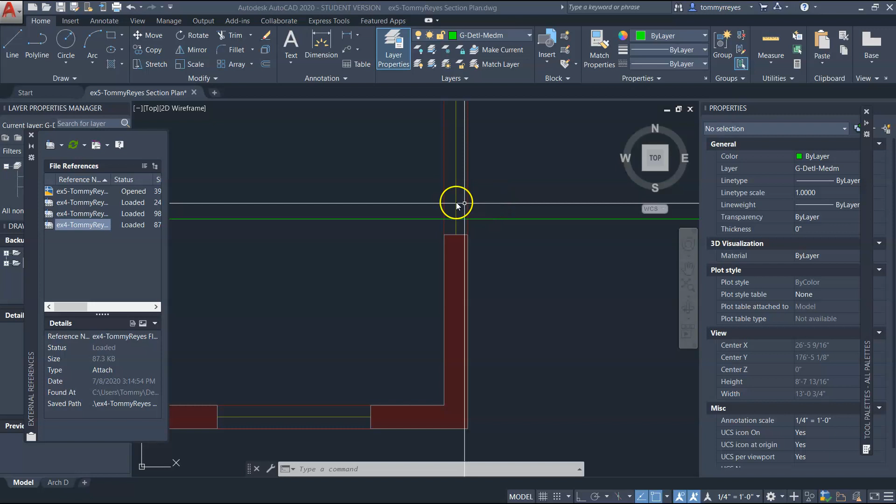Okay, I'm going to go ahead and show you how to do a wall section, but first I just remembered that we forgot to do this window. So I'm going to show you how to do that. And let's go ahead and get into this wall right here. I also have to clean this up as well.

So now we need to know this window height. How can we get this window height? Well, we can get that from the elevations. And let's look at what we need to find. Okay, so we need this front side. And right here.

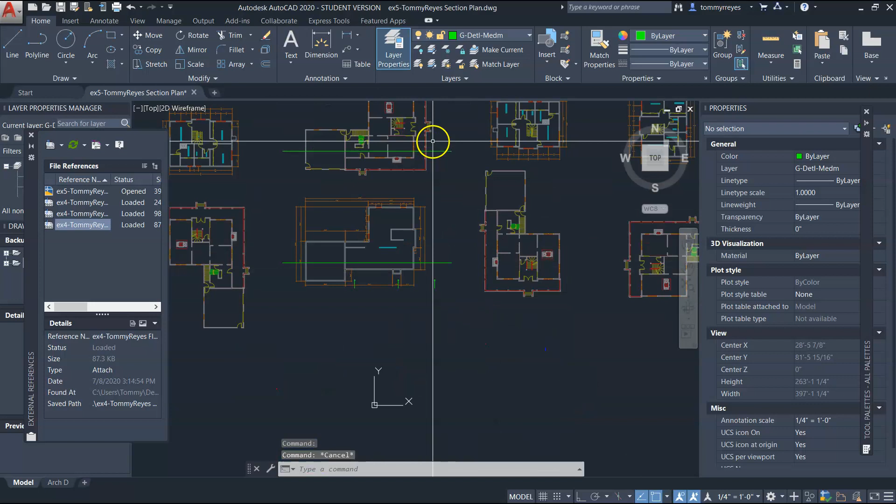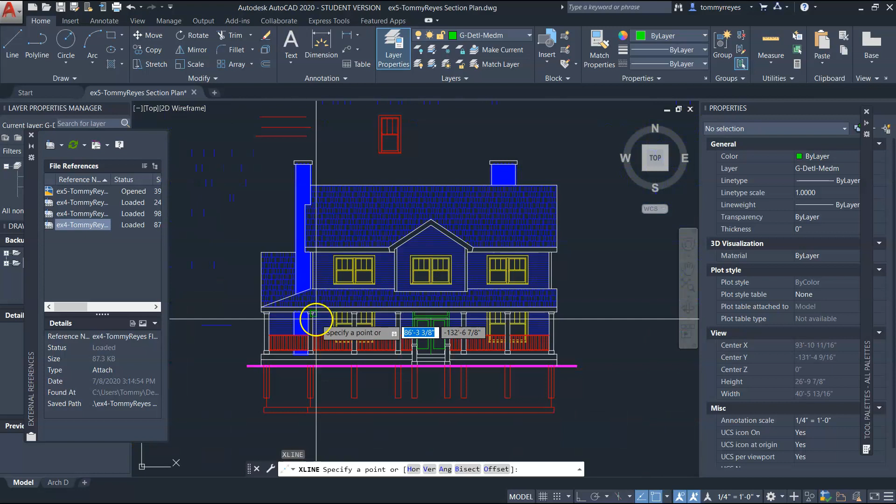So let's go ahead and get this going. So I'm just going to use this. In fact, this was the front side, but I know all these match. Oh, wait, here's the front side. So I know all these windows match up. So I'm just going to do XL, horizontal, H, and I'm going to match this up.

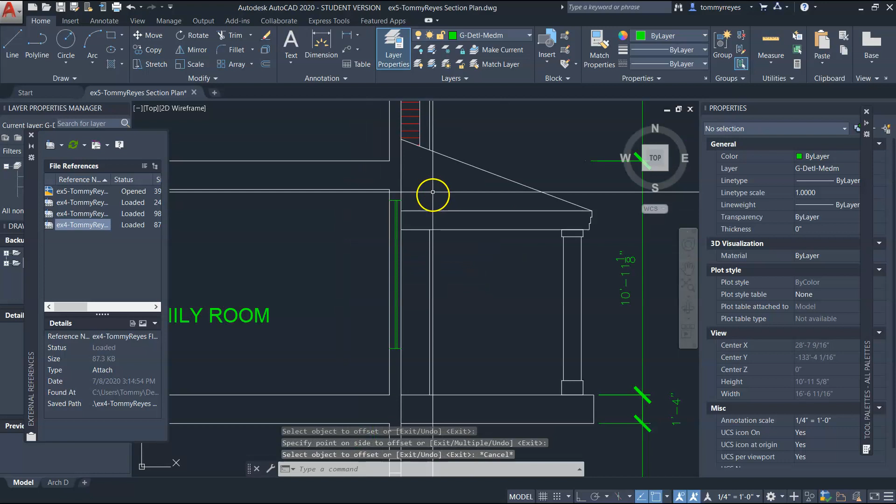Because we need to know where everything's at. And so I'm going to go ahead and trim here and here. And now I'm going to draw a line here and here, offset this by 1 inch. And there you go. Let me toss this on the window layer. So I got to make sure that everything's on the right layer.

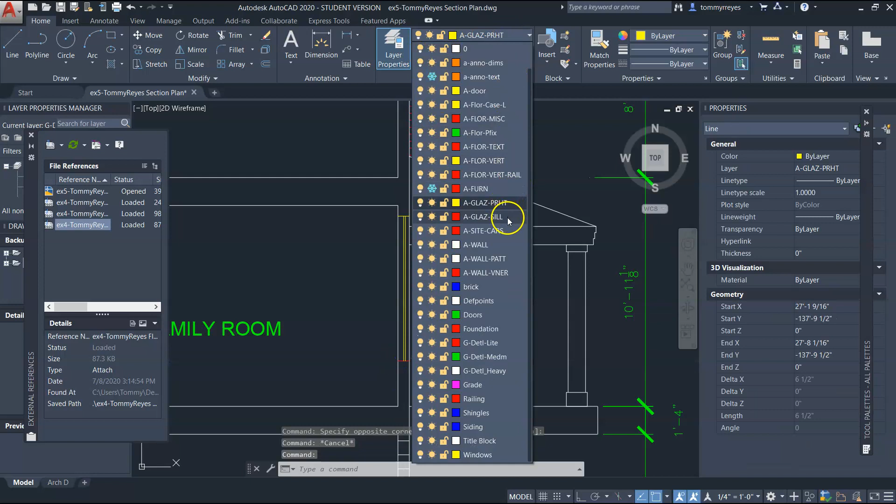So that's a sill. Okay. So here's the window sill. And here is, let's see, where's it? Sill. You know what, I'm just going to put that on the sill as well. Okay, there we go. And so this is the thickness of the window pane, this is the window sill, and this is the window header. And there you go. The walls are still intact.

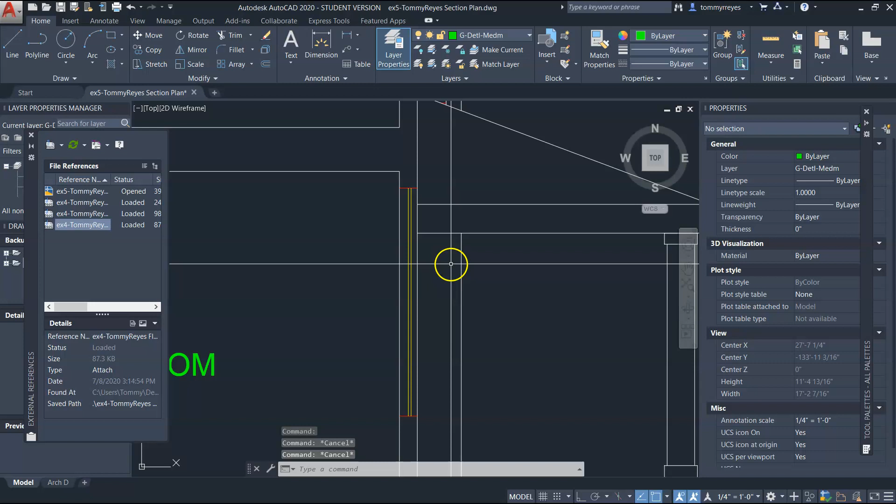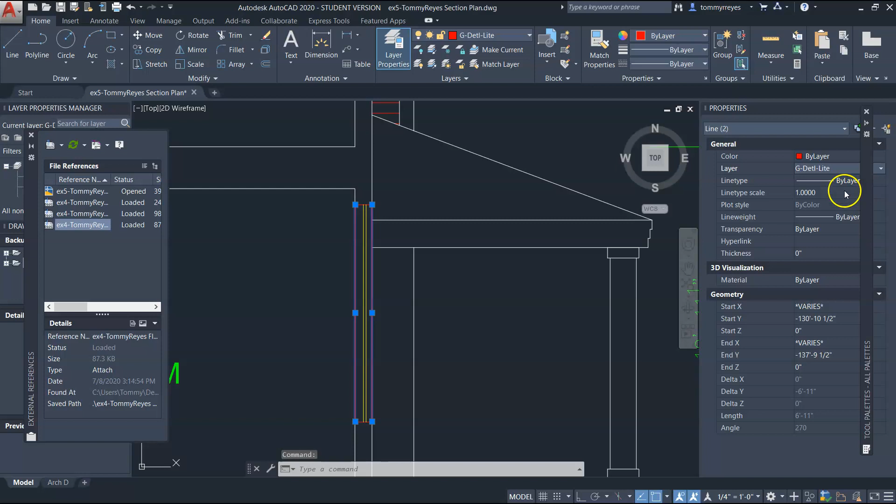And the reason why they're still, actually they should be broken lines. And let's do this. So I'm going to go ahead and fillet that. And some people might think, well, why does that matter? Well, if you want to show this a little lighter, which I do, I am going to show this a little lighter. I could do light or medium, and I think I'm going to go with light. And there we go. And so when that prints out, these other lines are going to print out pretty heavy, but this is going to show that this is a wall and not a section through a wall.

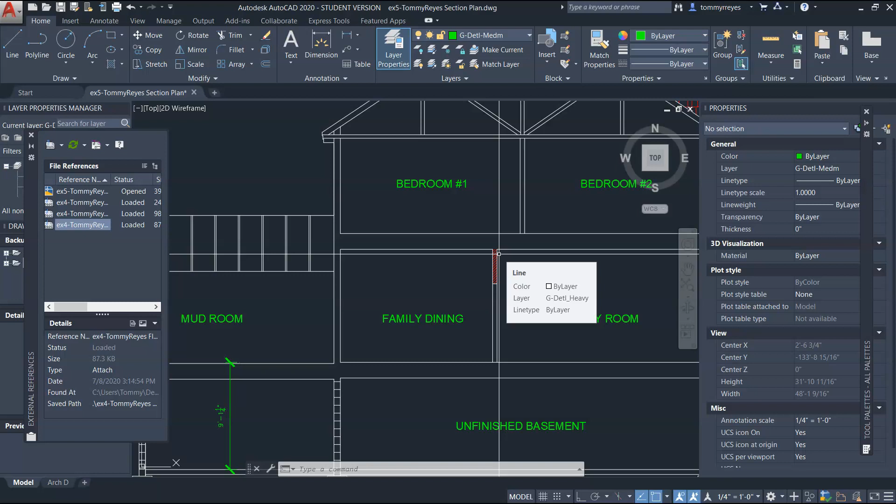This is a section through a wall. And so we are showing that. And since we're cutting through walls, you can actually hatch if you want. But we're not going to do that. I just showed you this part right here. You're actually supposed to hatch through all of these. And I want to say it might tell you how to do that later in the chapter. It might not, but you're supposed to hatch these. And in fact, go ahead and hatch them. Let's go ahead and do that. So let's move this, and let's talk about hatch.

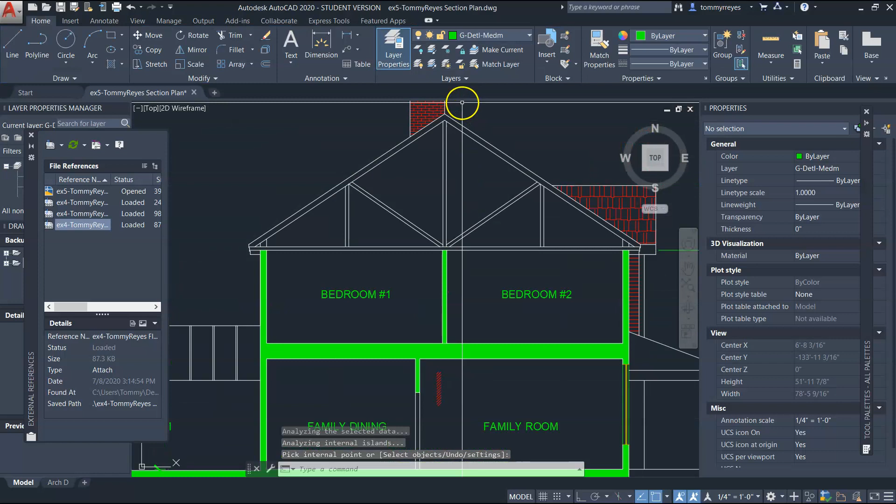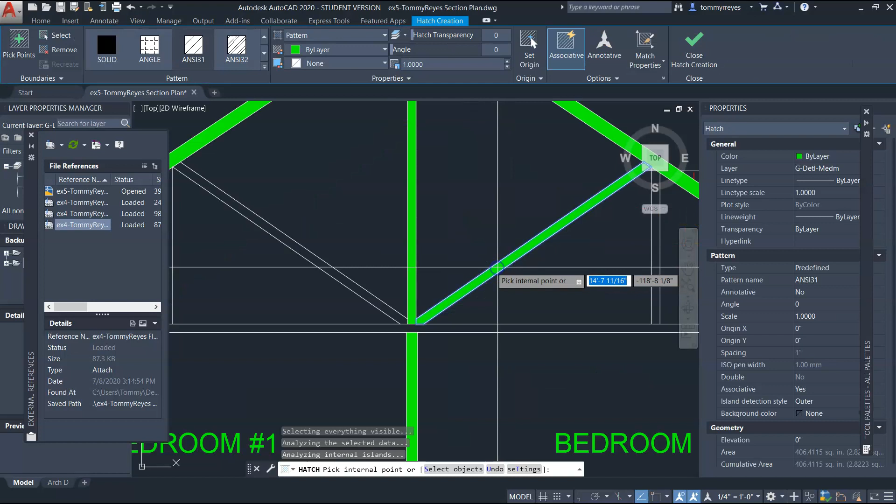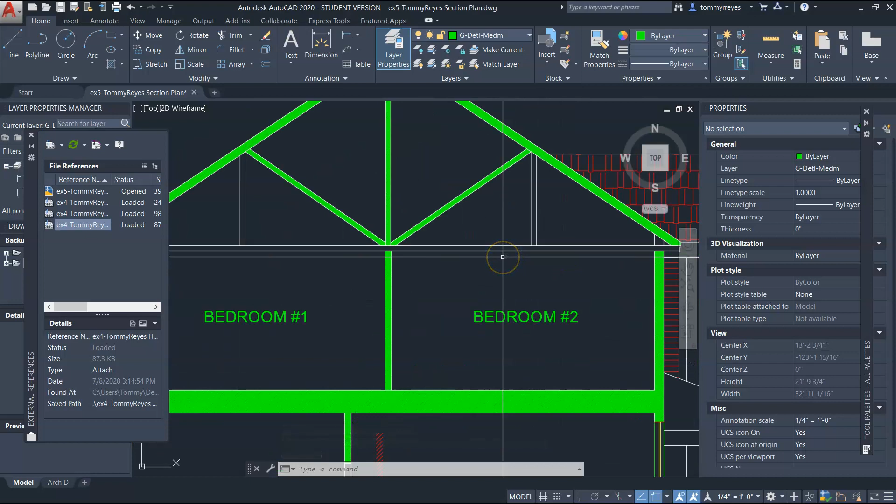So when you hatch, you don't want to hatch everything all at once. If it only highlights very few things, well, that's fine. I hit the spacebar often because the hatch command is notorious for messing up things that you didn't intend to mess up. So it's saying that there's no closed boundary determined, and that's because everything is sort of off screen. So let's see. There we go. Specify the point located on the object. Okay, so I accidentally hit completely on an object. Okay. There we go.

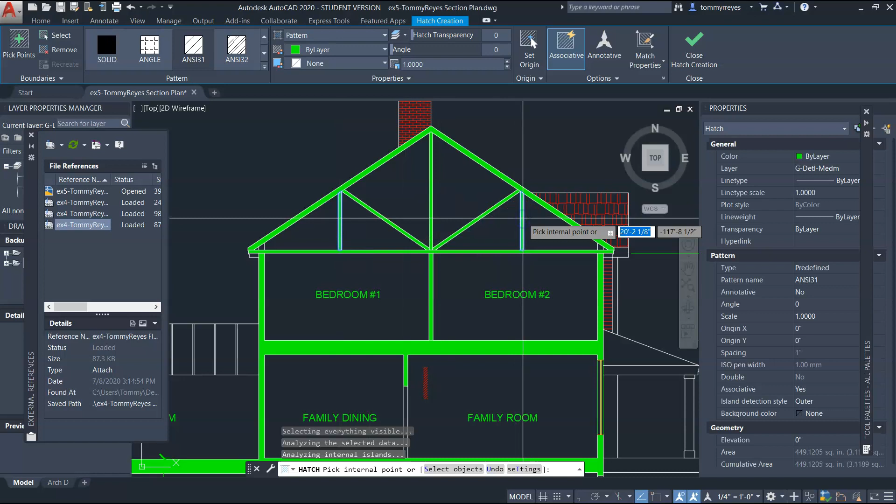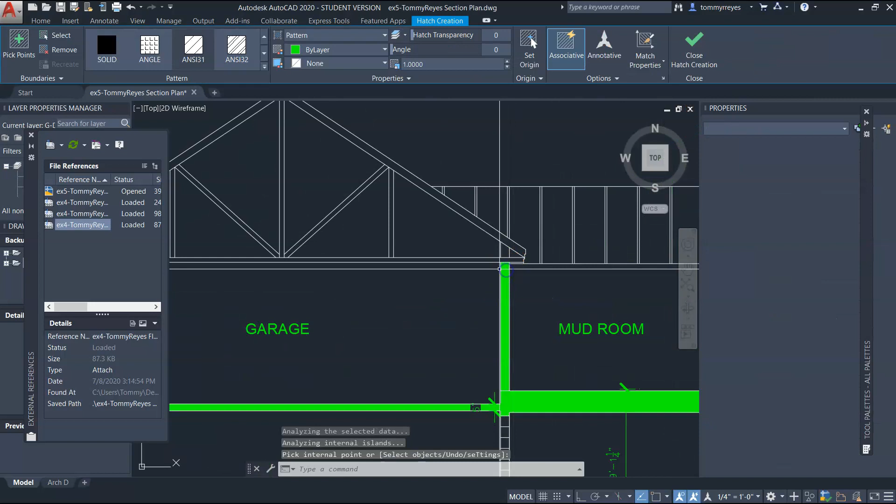And you see I said it works funny? If you hit an object, like a line, it won't let you hatch properly. So I'm hatching, spacebar, getting in and out of the command as often as I can, simply because it is problematic to try and hatch everything. And should you ever need to make corrections, it's good not to have everything on one single hatch. It also slows down your computer processing.

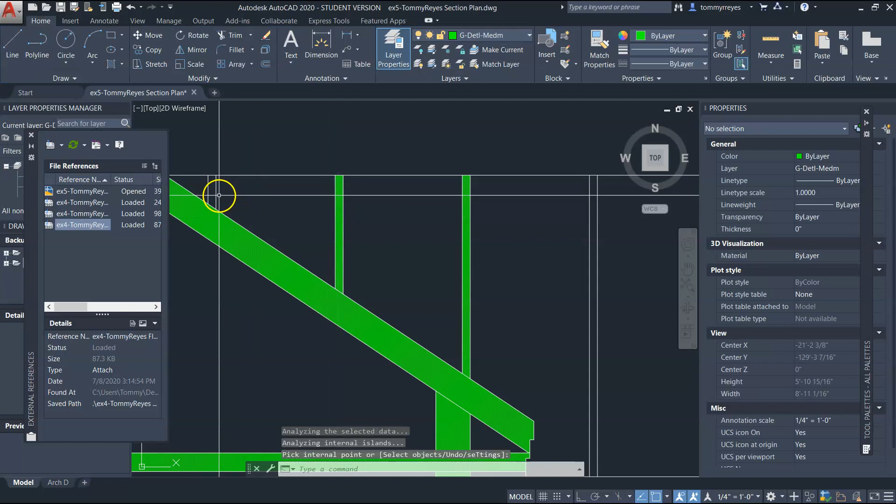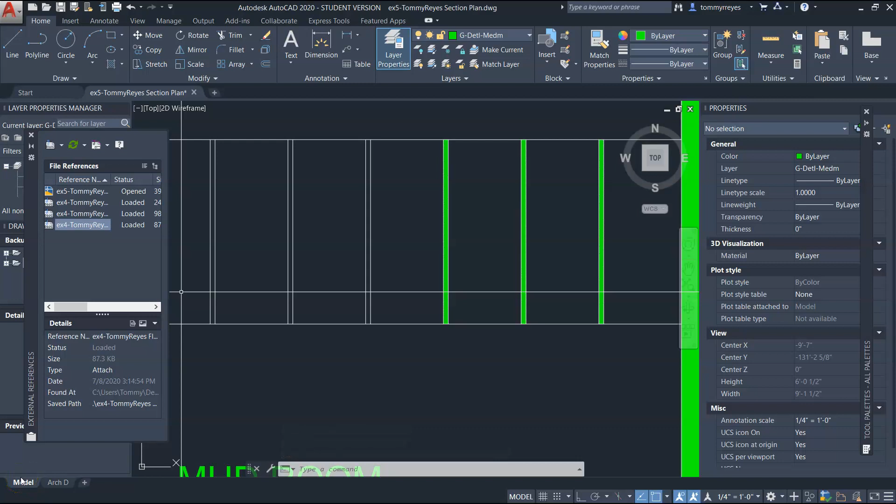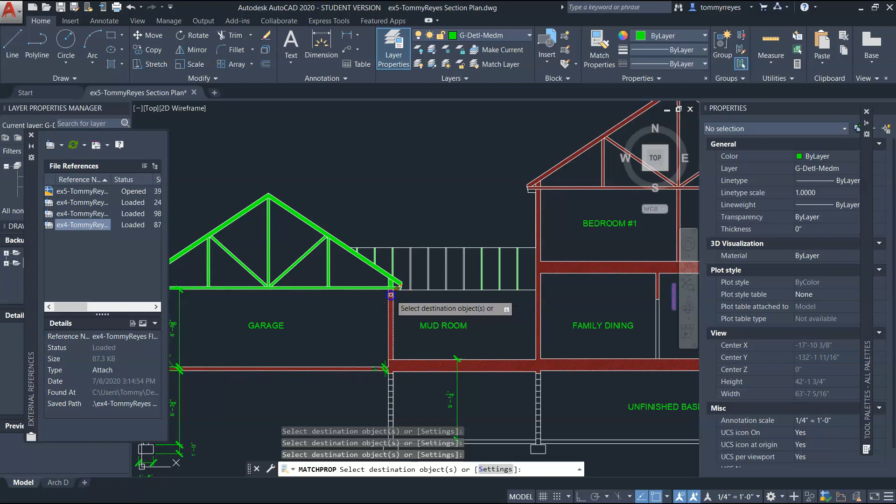So that's why I like hatching like this, individually, and I can ensure that everything is done how I want. Alright, I'm going to go ahead and pause this, and I'm going to go ahead and put this on this layer over here. I'm just going to match properties. In fact, I'll go ahead and do that right now. Match. And I'm going to do that all over, just to make sure that everything is done how I want it. Anyway. Alright, so I'm going to go ahead and pause, and I'll be right back.

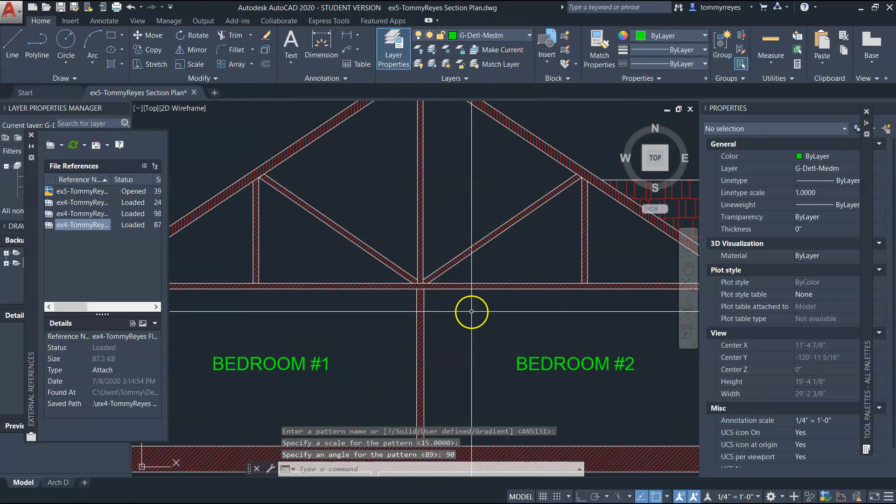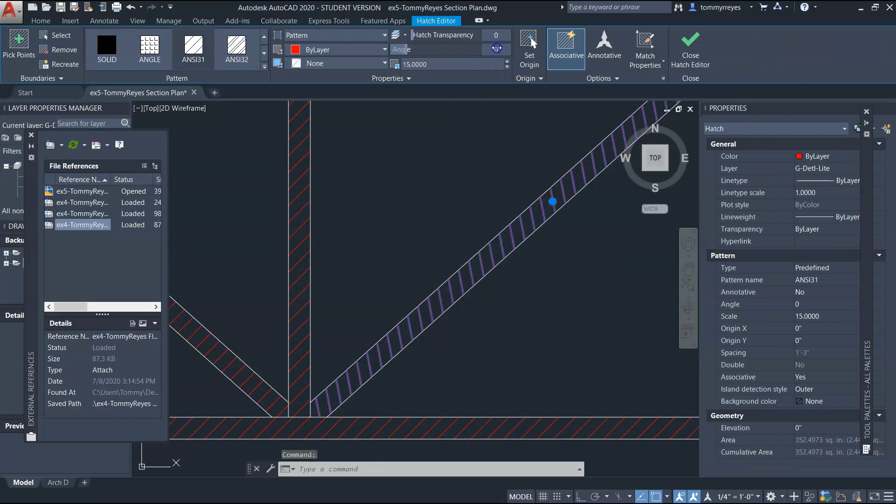So here's another reason why you should do these hatches by themselves. So see this angle right here? I want to change that to kind of match what's going on over here. Change it to 90. You could also type in 90. And that way, some hatch patterns, let me delete this one, they don't get lost like this because of the angle. And so, again, I'm just going to change this to match, and this one, you can see how over here it really loses. I'm just going to go ahead and change that to 45.

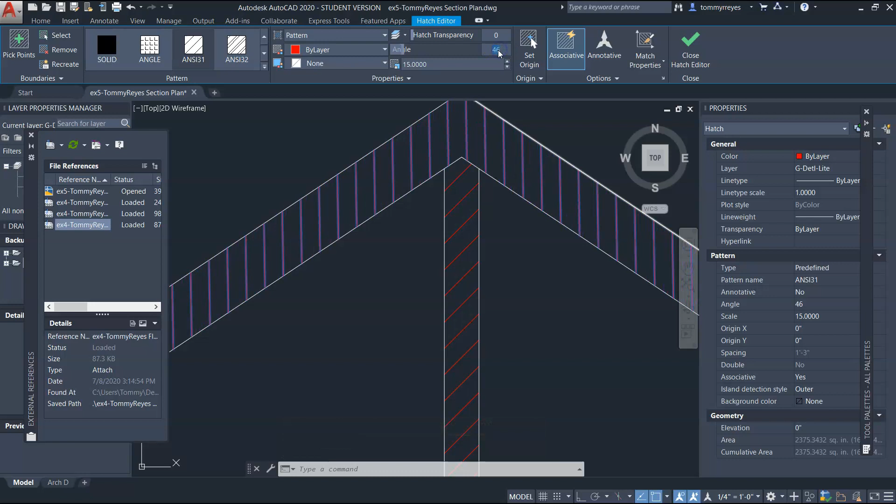And so that's why I like to hatch like that, just FYI. All right, so now if we look to exercise 6-2, you're doing a wall section. And I'm not going to go through every step. I'm just going to show you exactly how I would start it.

So I would go here, copy all this. So CO, and let me go ahead and bring that over here. And now I would just clean things up. Let me go ahead and get rid of all these hatches. Great. Looks like, so on page 6-7, I would recreate that.

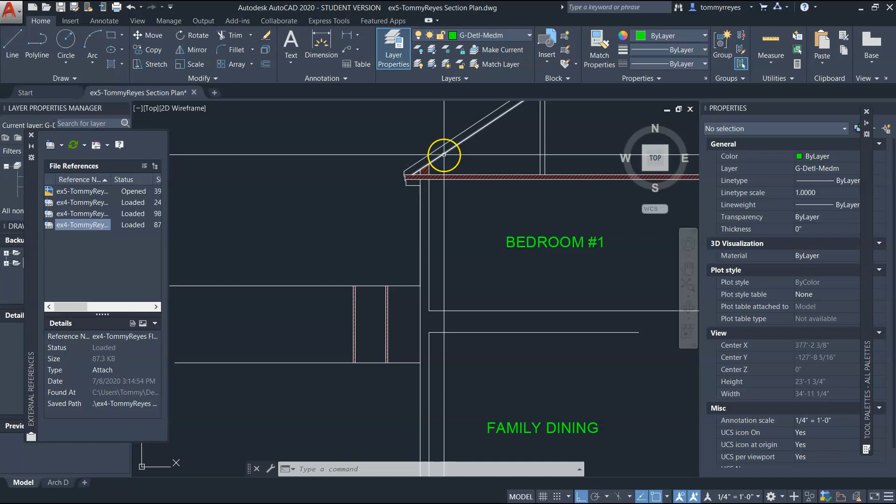Looks like there might be some shingles that you're going to need to put on. And if you turn to page 6-8, right here is where they're talking about. This is where the concrete block ends, and you're starting to have other features. And so I would go ahead and do that.

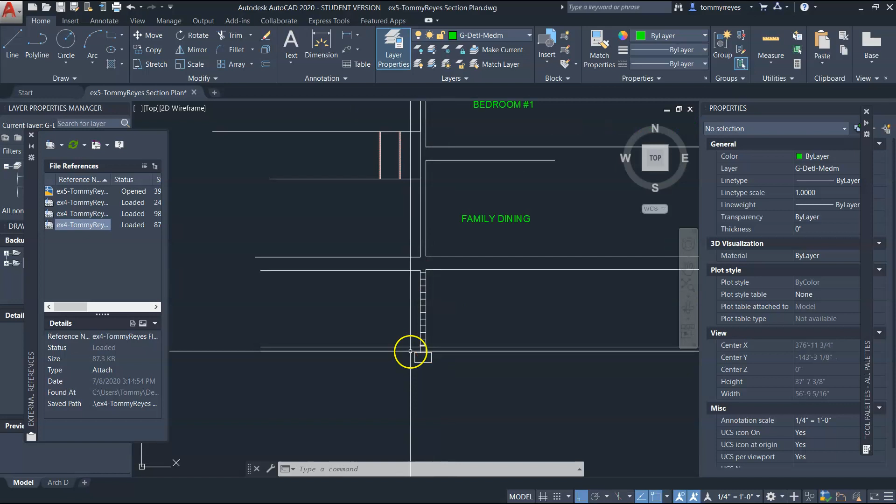Yeah, so here's like a 2x8 right here, rectangle. So right here, REC, 2x8, and so let's see, 8, tab 2. That didn't quite work out. All right, 8 inches, tab 2. There we go. So this actually should have been an 8-inch wall, and I'll have to go back and fix that. So let's do 8-inch. There we go.

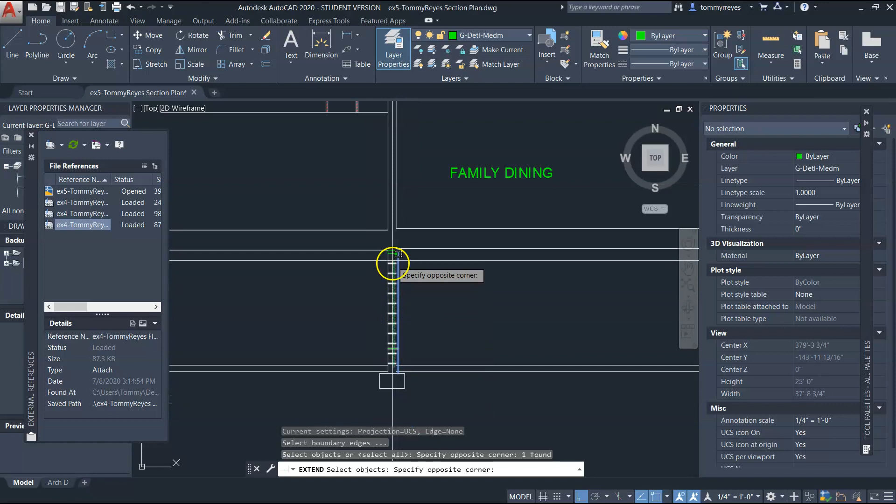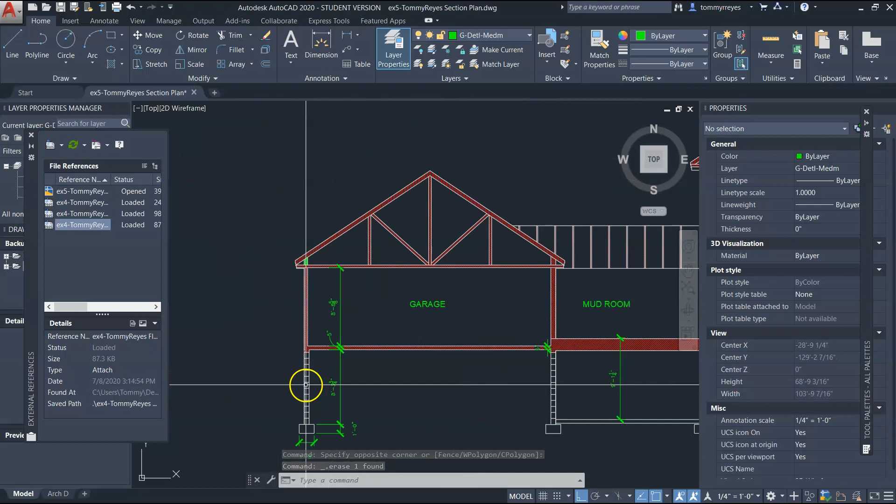Let's move this over, extend all these lines. And let's go ahead and trim this. So this will have to be moved over. There we go. And I'll have to go back and fix that in this section as well. This needs to be an 8-inch wall. So 8-inch. Yeah.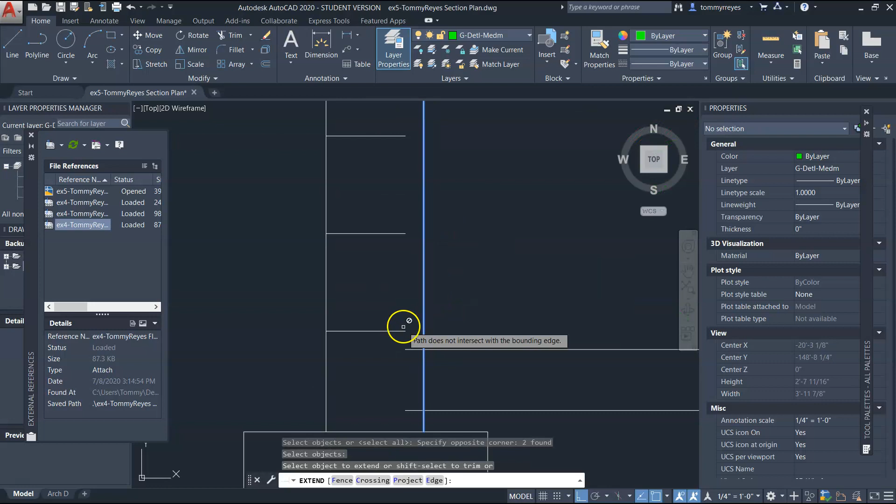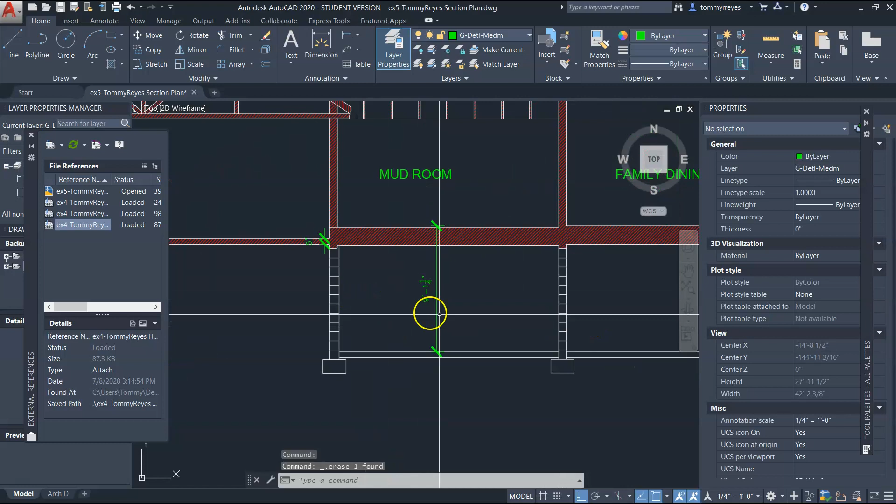Move. There we go. Extend. Spacebar. There we go. Trim. Trim. Smooth this. Delete. And delete. So that needs to be an 8-inch wall. This also needs to be an 8-inch wall. So I'll go ahead and fix that later, but you get the idea.

All right. So back to here. Now that this is fixed, you can start continuing. And this is supposed to be an exterior wall, so we're not going to deal with these lines. And this is why I say you just clean this stuff up. So this 2x8, it's going to be 1.5 by 7.5. And so I need to shrink this down 0.5, and this way 0.5. There we go.

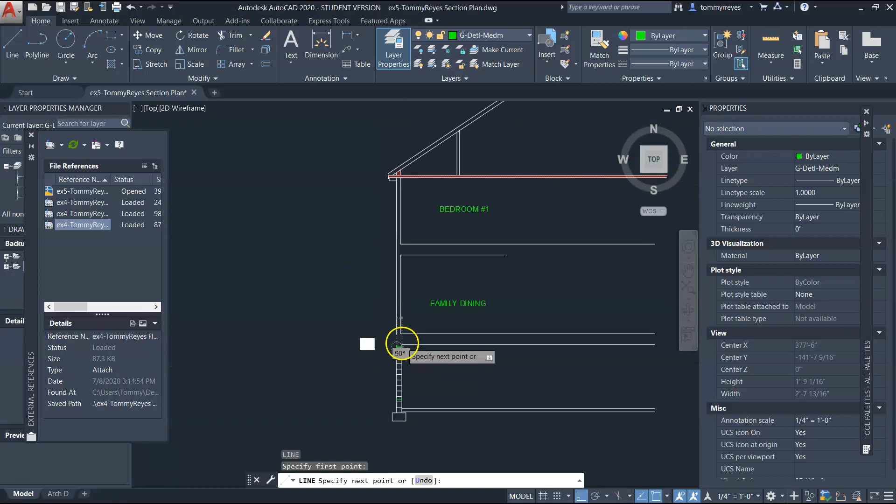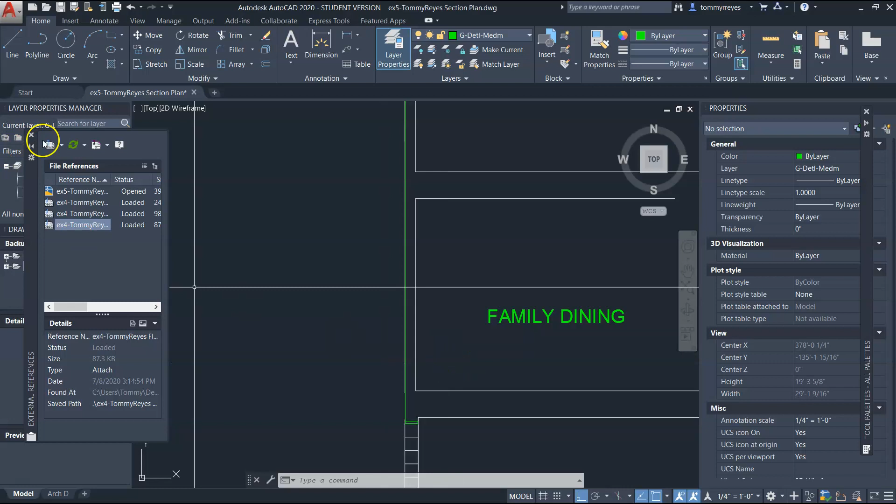Alright, so this looks like it is right here in the middle. And we have a little bit on this side, a little bit on that side, and that's okay. This is where the plywood goes. So we want to go all the way up to here. And then continue to draw. So you have the siding, and it looks like there is a little blocking that goes. Well, let me delete that. Let me copy this, and I'll go ahead and change the.

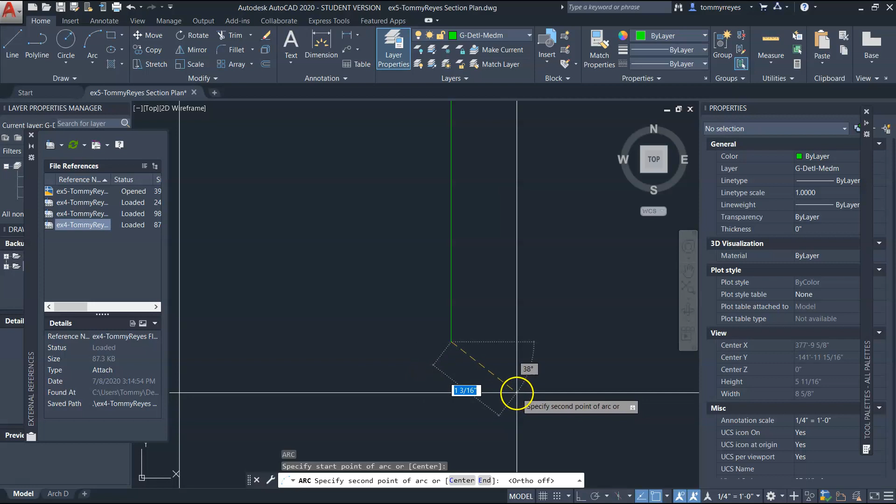All right, so there's an anchor bolt right here, and what this is again, do your best to draw this. It's a bolt that's cemented down into the, actually, let's do this. Into the concrete block. So I'm going to do a fillet radius, and I'm just going to do 3 inches. Let's see what that looks like.

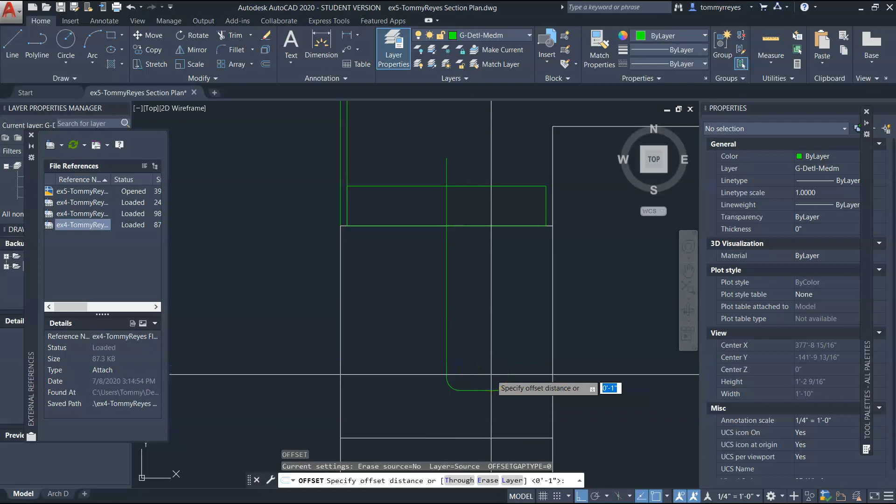All right, fillet radius. Let's do 2 inches. A little too much. So fillet radius. Let's do 1 inch. Nope, still too much. Let's do 1/2 inch. Fillet radius 0.5. There we go. Offset. Let's just do 0.5. And then do your best to draw a bolt.

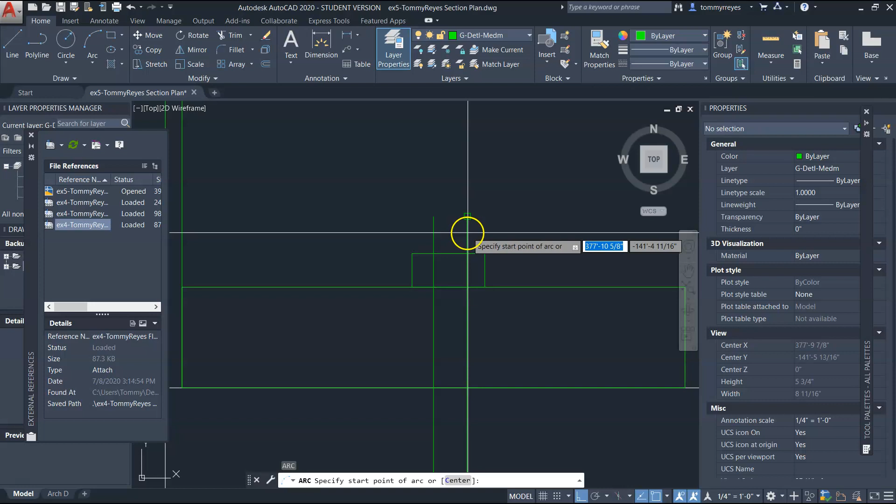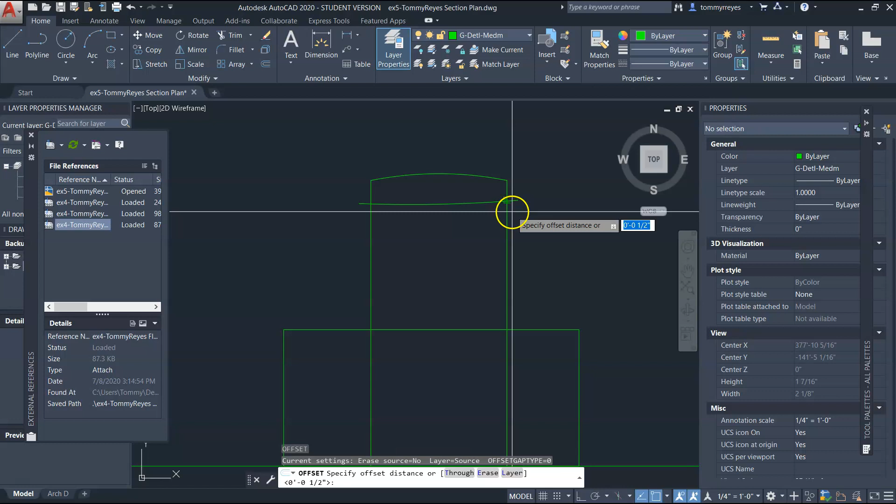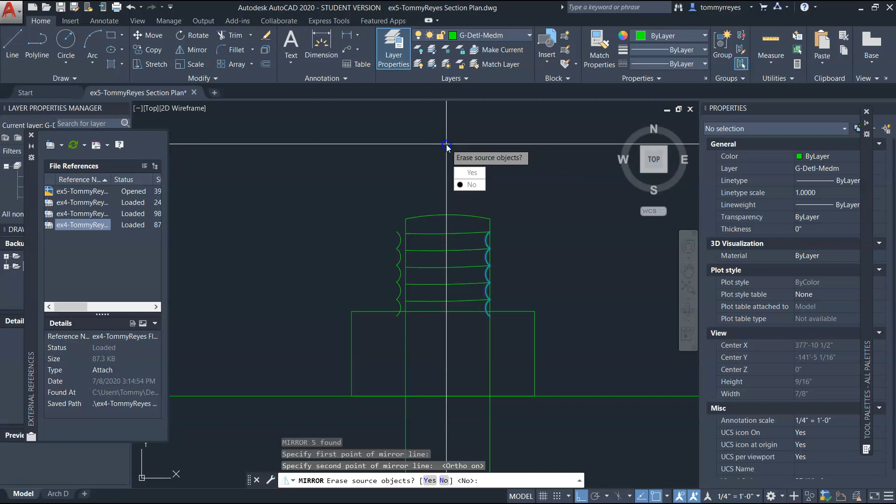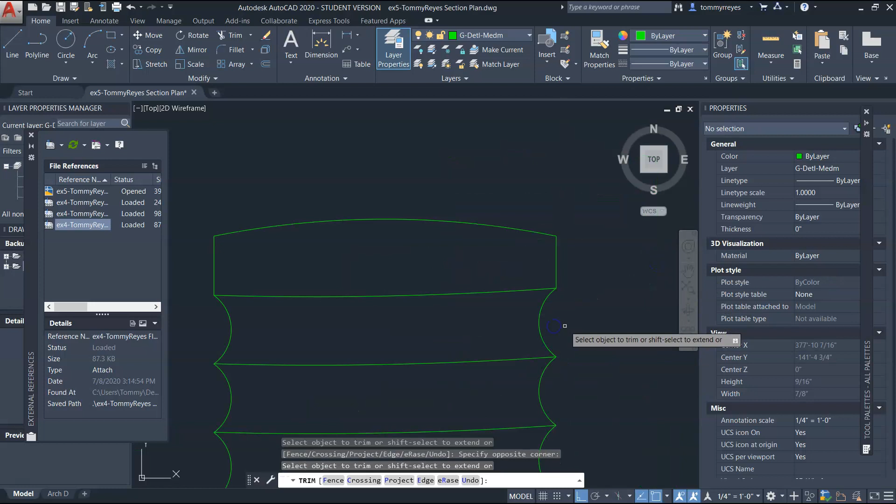There we go. I'm just going to move that to center. There we go. And then now I'm just going to do offset point one. And then, again, you don't have to get as detailed as I'm getting, just get relatively close. I mean, I can get more detailed if I really wanted to. Right? And here you have a bolt. Anyway, so

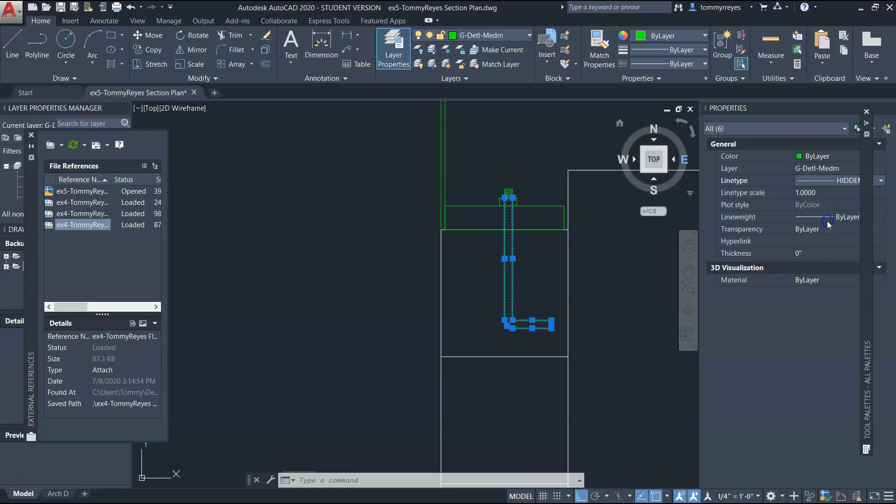these are going to go into hidden lines. Let's put that line type into hidden. There's probably another hidden one somewhere, but we'll use that for now. Let's change the scale to 5. There we go. And that's fine. So these are anchor bolts, and this anchors this frame down to this block wall. And you want that. And so that's what we're showing.

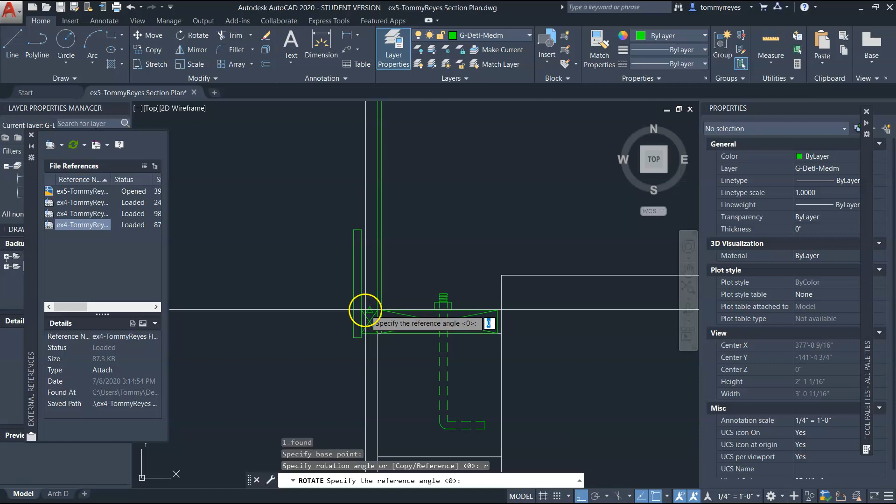And I'll show you what I mean by, so I'm going to rotate this. I moved this over here so I can rotate this. Reference. Control L. And it's snapping to everything but where I want it to go. So I'm just going to get it really close. Nope. Alright, so I'm going to turn off my O-snaps.

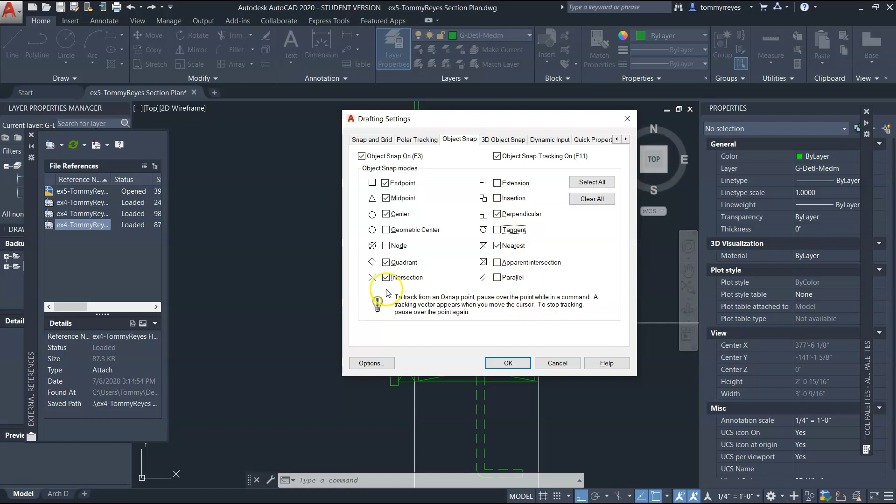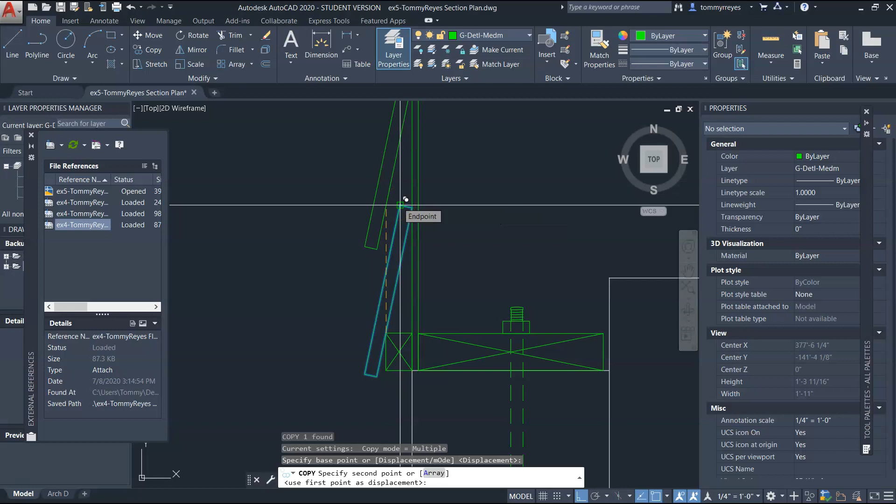Let's just do... I think I have too many on, so let's take off node. Let's turn on nearest, and let's take off tangent. Yeah, that's fine. Alright, again, I'm not going to do this entire thing. Reference. There we go. And that block might be a little too big. So let's shrink this down.

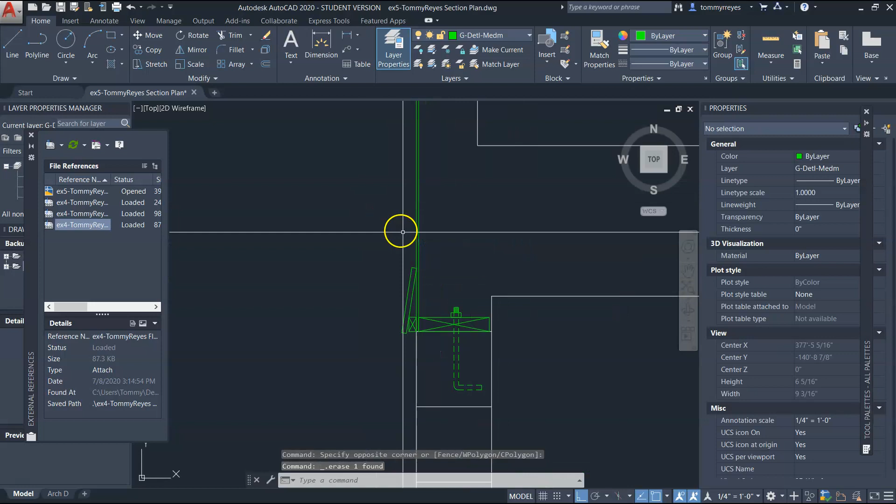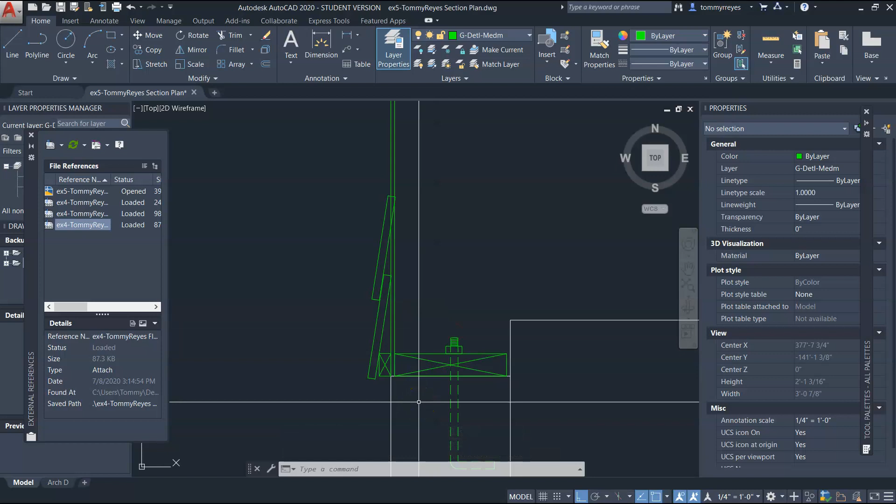Rotate. Just from here, reference, here, here. There we go. Just delete that. Let's try this again. So copy. And there we go. Still a little too big, but anyway, you get the idea. So I'm just going to shrink that block down a little bit more until I get it right, and just start layering this over and over.

So actually, it's getting me. It's getting the best of me, and I don't like it. I'm just teasing.

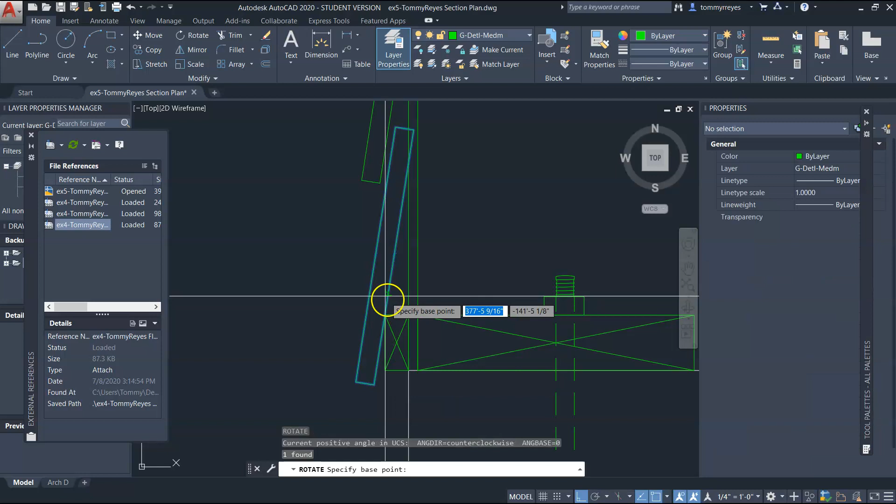Alright, let's try this again. Rotate, R. There we go. I probably should just make it this size. It's getting closer. So, let's do 1/2 inch.

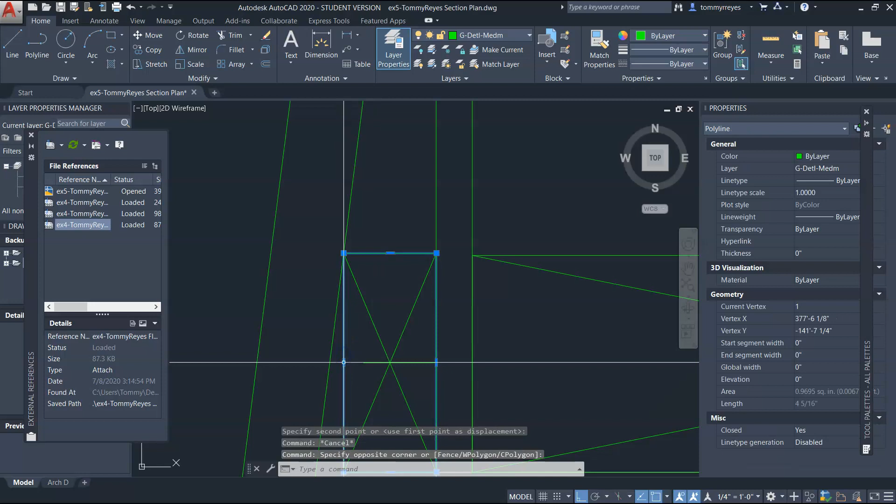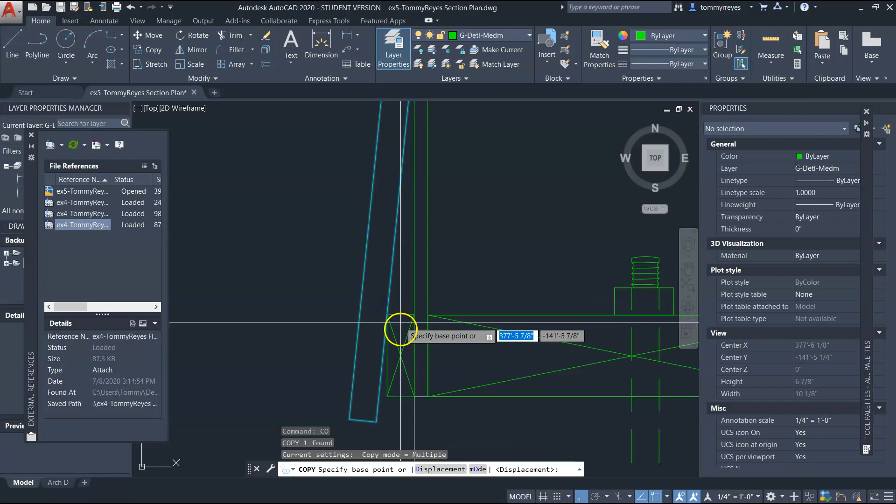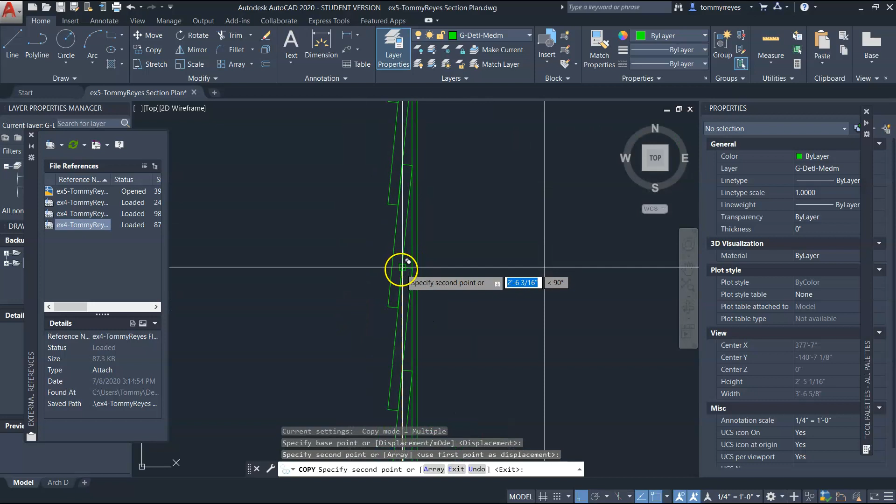Go. Move. Rotate. Rotate. R for reference. Go. And let's see how this goes. C. Perfect. There we go. And then I could just keep going up and up and up. Anyway, so do your best.

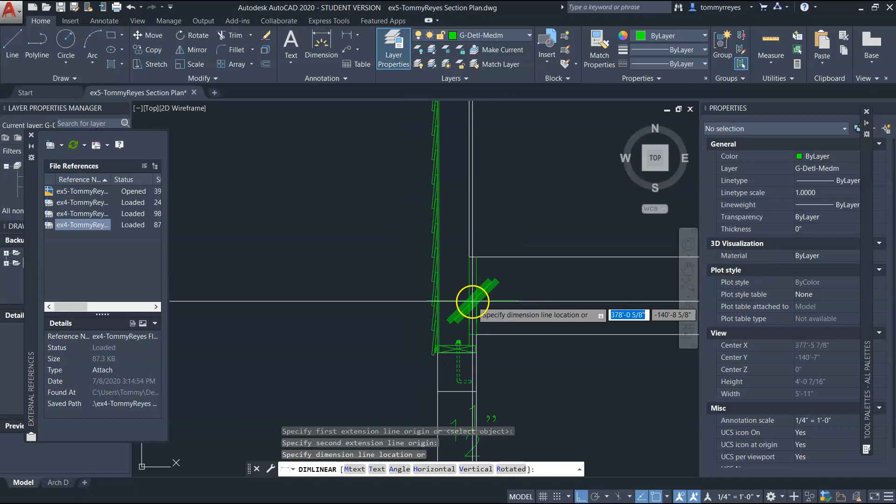The rest are just hatches and adding annotation. The wood trusses, you'll see. Something like this. That's 2 inches, so offset 2 inches. No, probably 1.5 inches. So offset 1.5. Yeah, it looks more like it. All right.

There we go. And just draw these at a 45-degree angle. And so you can tab. Let's just draw this 5 feet. Tab to 45. There we go. And trim. And now, kind of did it the wrong way. Let me mirror that. Yes, let's delete that.

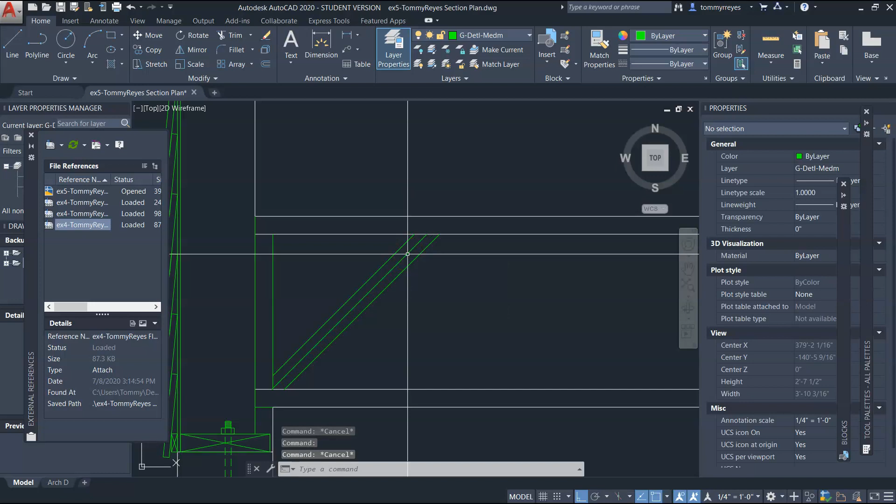So offset, and I did this 1.5, so 0.75. So offset 0.75. And trim here, here, here, extend here to here. And we want to mirror this from here. And hit no, that's fine. Trim this, this, this, delete this.

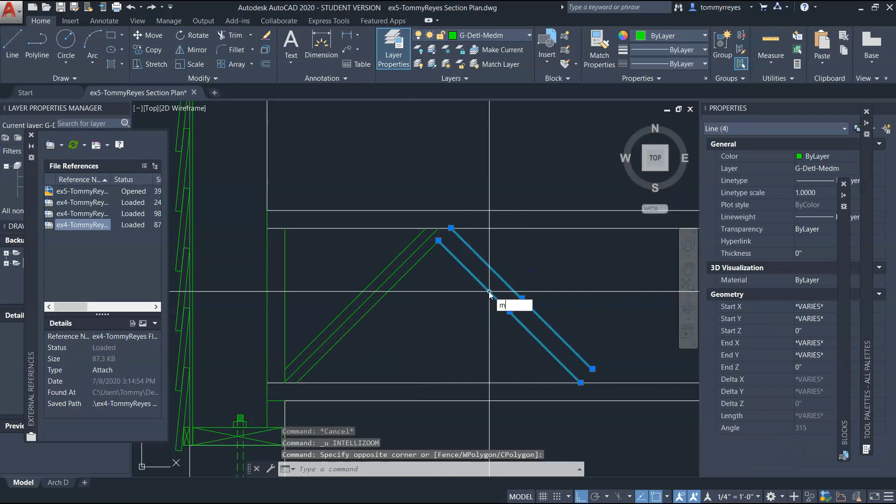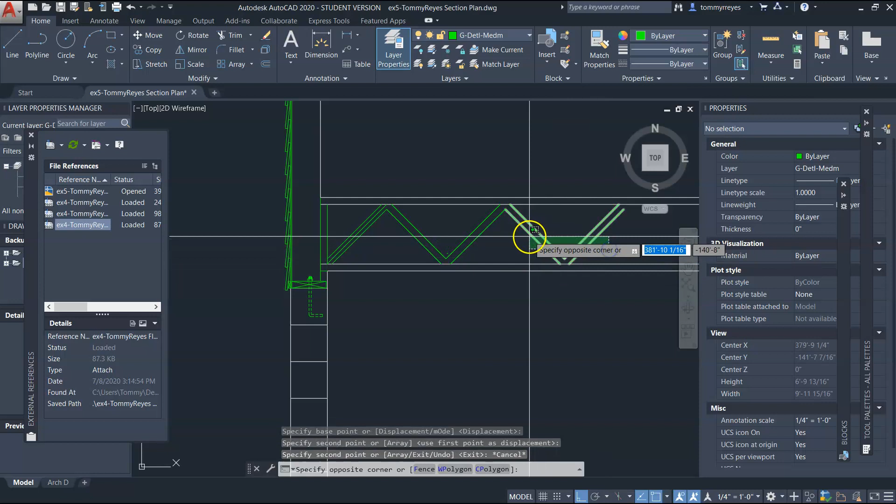Actually, not delete. Let's mirror this. Where'd it go? Oop. Mirror this. No. And then mirror this. No. And then now we could just copy all this, and keep going. You don't want to go on forever because it's not necessary.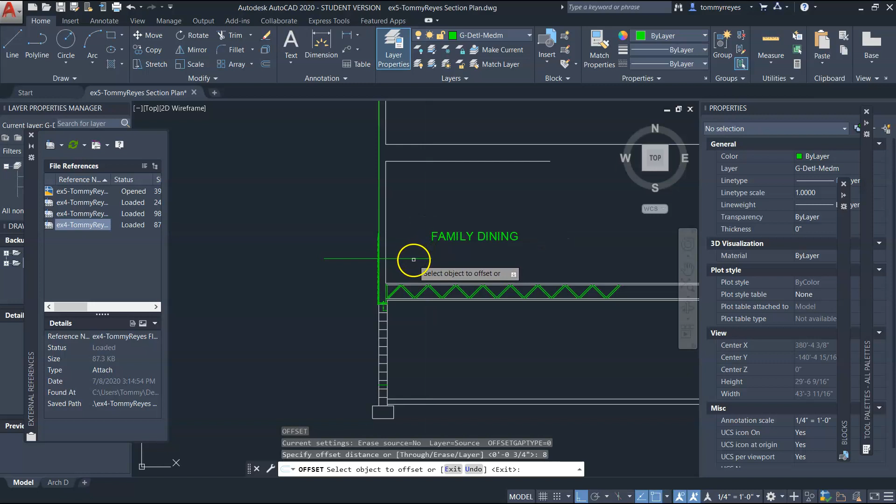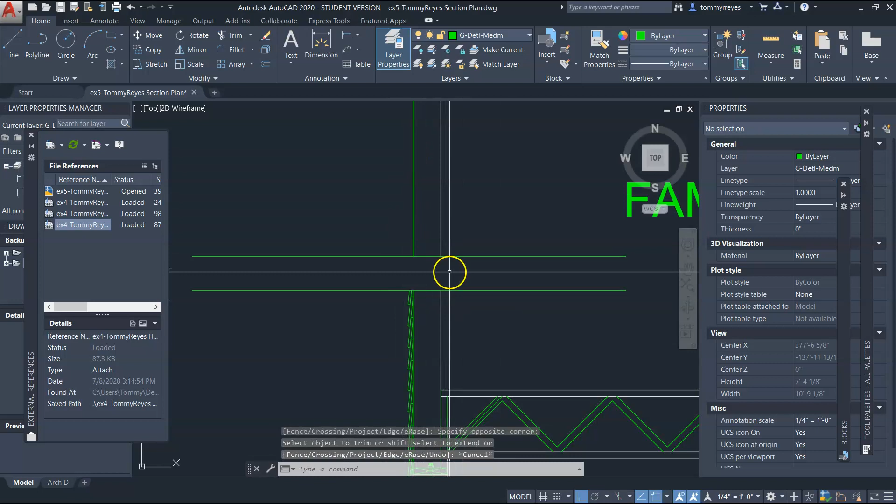In fact, you are going to use a break line. And so let me go ahead and teach you how to make a break line. So here is one. Just offset this 8 inches. There we go. That's a good break line. And so this gets deleted. This gets trimmed. And all a break line is, it's saying that this pattern is going to continue. And so now what I want to do is I'm going to draw a line. Where's my, oh, it doesn't matter. I'm going to draw like a zigzag.

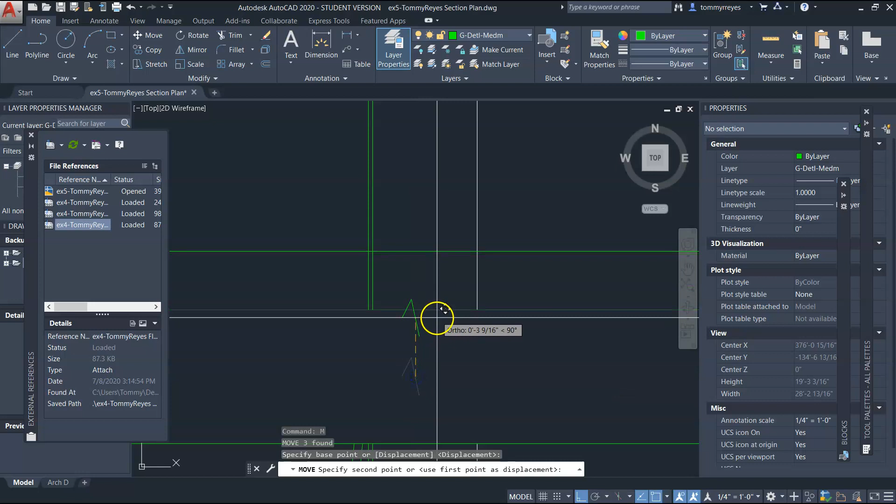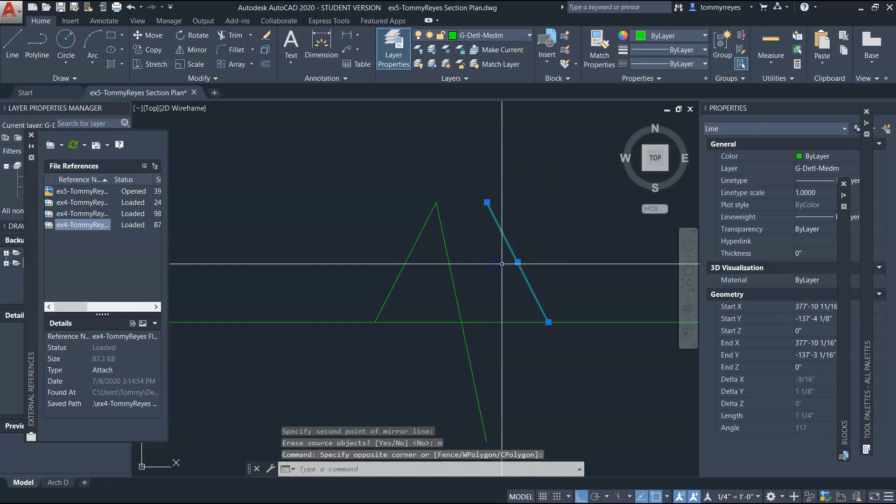And I don't want that right there in the middle. The reason why I want this closer to the middle is because I'm going to put this in the middle. So watch this. Here, here, there we go. Oops. And now let me extend this. Let me mirror this. I'm going to mirror this a few times. No. Mirror. Yes. Trim here and here.

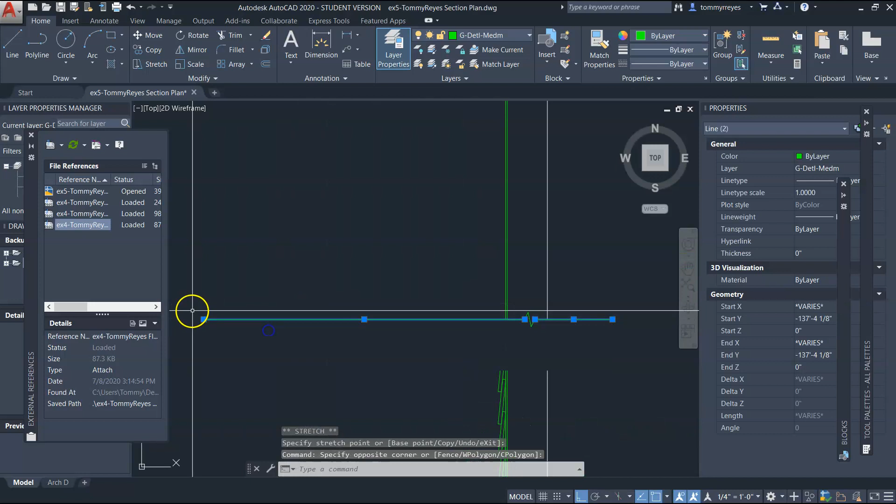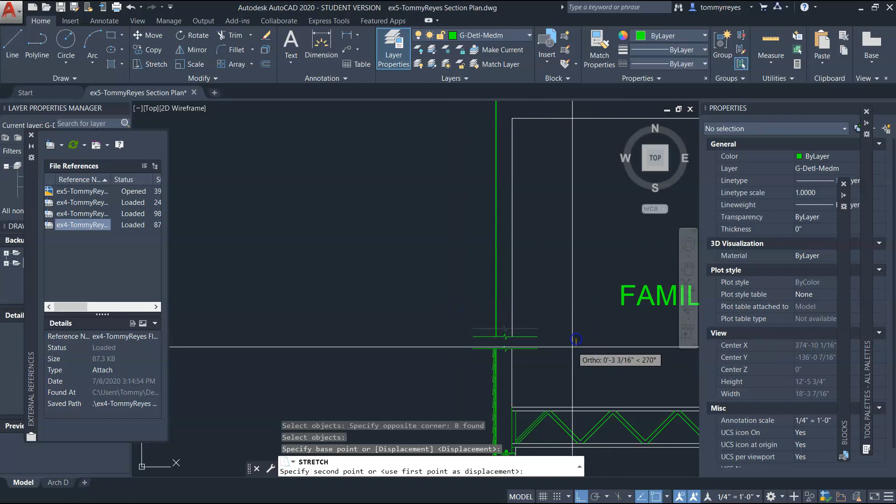Now, what I'm going to do is delete this, and I am going to trim this down to, actually let me delete that, just copy this here to here, there you go. CO, and now you have break lines. And I could have done these break lines a little closer. If I need it closer, I just use the stretch command. Yeah, maybe something like that. And there you go.

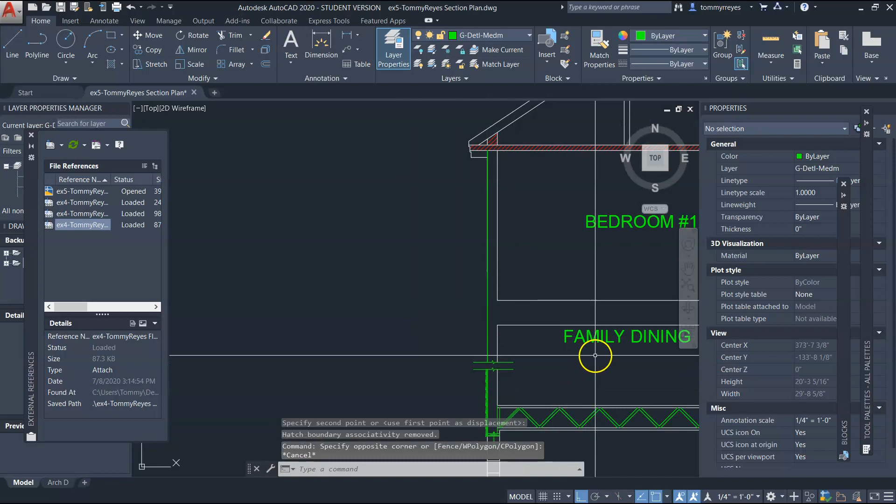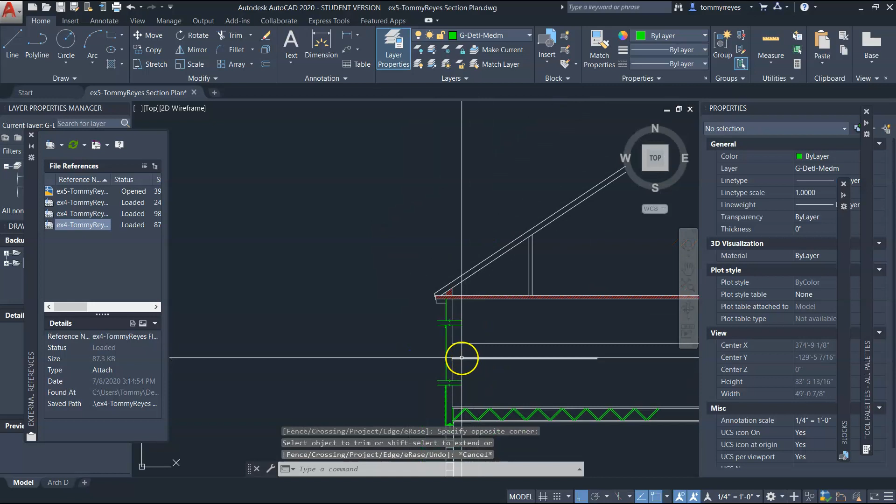And I would stretch, and we don't need the names, so you know this is a wall section. I would stretch this as well. Probably just copy this and move it up. And there you go. I would show this connection as well.

So on page 6-13, I would probably make a copy of this before I start doing break lines. On 6-13, you're going to do the entire wall, so you'll be able to see it better on page 6-13. Anyway, that's how to do the wall sections. Just do the best you can and look at page 6-8 and 6-9 for reference, 6-7 as well for this connection here. And I think you'll be fine.

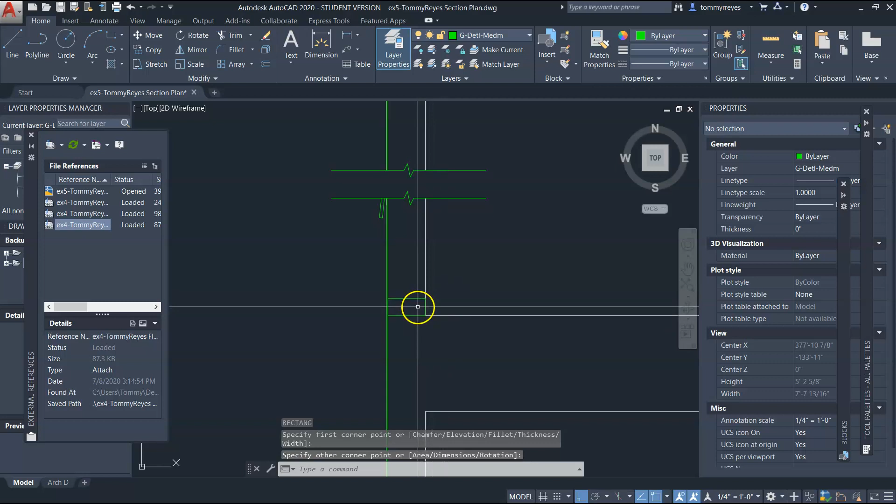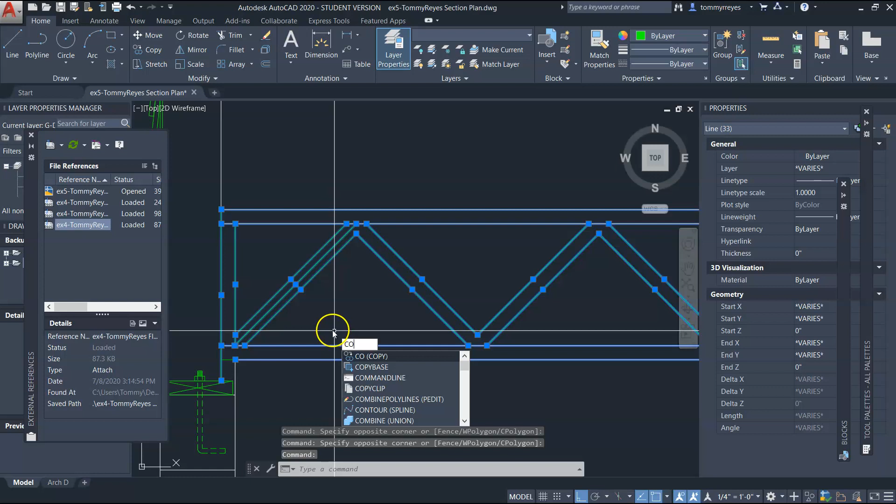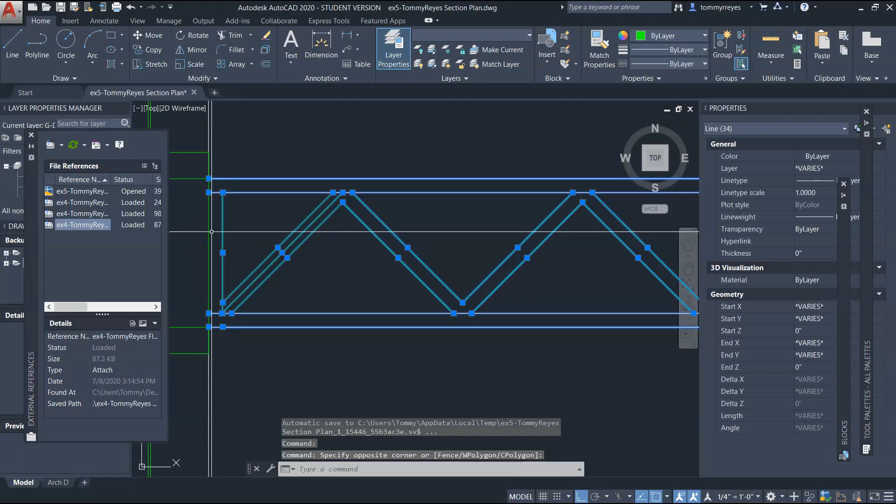You'll be fine. Looks like there's a 2x4 over here. So, something like this up here and down here. And then it's going to show this again. So I would just copy this. Copy all this. CO, space. And there you go. Probably not drop it over there. Drop it somewhere over here. So you get the idea. So I could just move this over here. There you go. This is how you do a wall section really quickly.

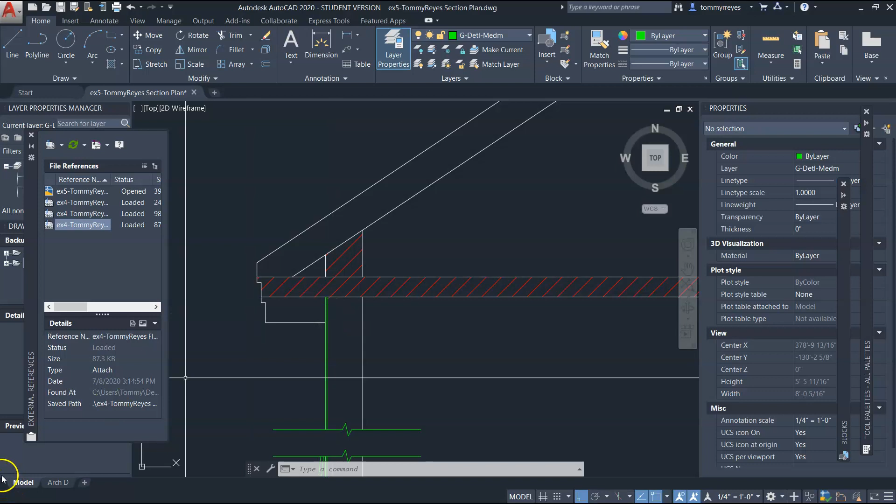This will be a little bit more intricate. This connection right here, you'll see that on page 6-9. And so go ahead and give it a shot. But this section is relatively easy. Just do the one section. You don't have to do the second one. But do the details. Do the wall section and the stairs section. Show the stairs from the mudroom to the unfinished basement. Go ahead and do that one. And go ahead and do the stair detail. Alrighty, that's it.